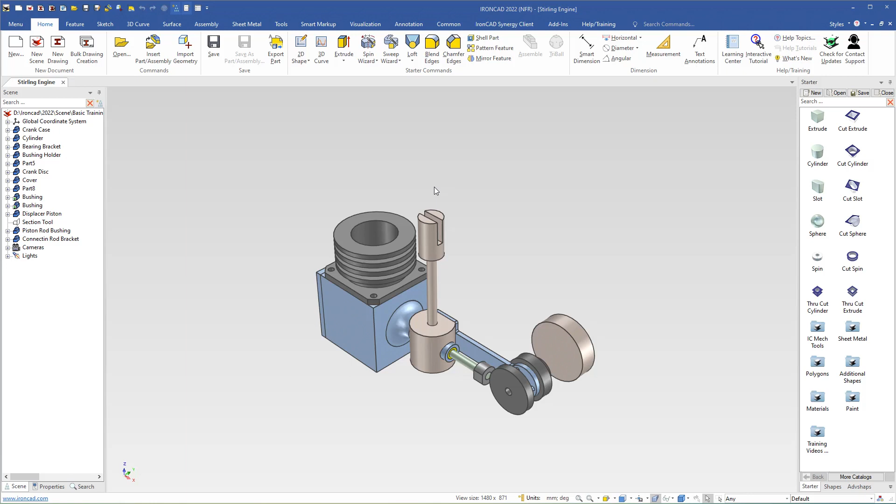Now we will prepare to fasten the crankcase to the pillar, and we will also prepare for the mounting of the connecting rods that we will create later. And we need to add some threaded holes here on the pillar, on the bracket and on the crank disc, and up here on the pillar.

And we will use an add-on to add the holes. And you find the add-on here. If you click more catalogs, we see these catalogs, ICM catalogs, and ICM stands for IronCAD Mechanical, and we will use the ICM Mech catalog.

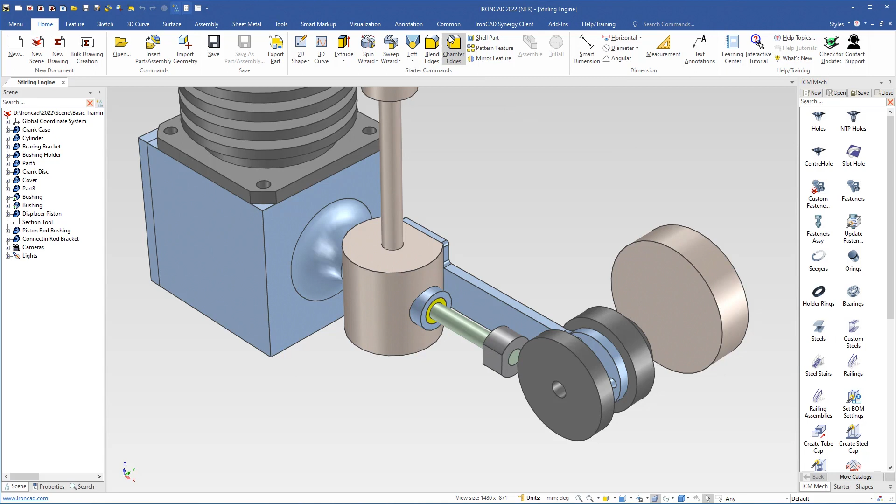If you don't see these catalogs, the ICM catalogs, and you have installed the add-on, you have to come up here to the Common tab and here the Catalog Sets button. If you click here, you will see this menu, and here you have Iron Pro. If you select Iron Pro and open and done, you will see the catalogs here. But if you haven't installed the ICM catalogs, you can use the Tools catalogs to follow along this part of the course.

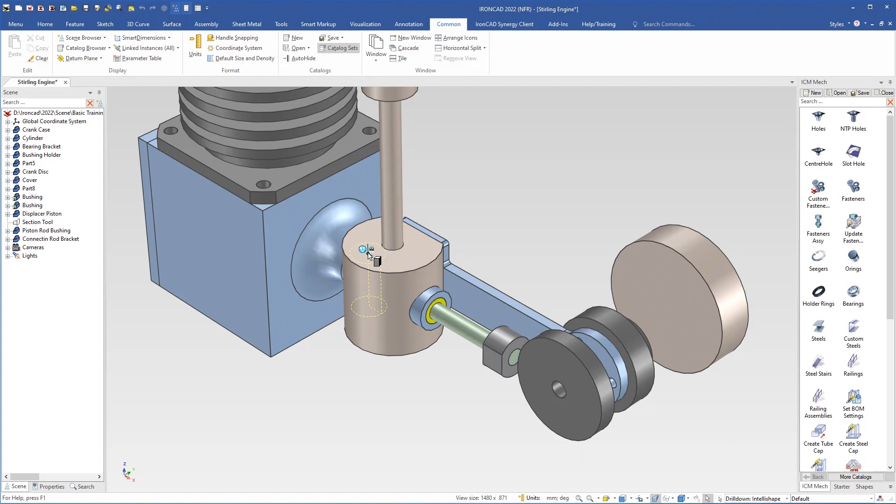This ICM Mech catalog contains several useful features such as holes, fasteners, O-rings, bearings and steels and so on, and all parts are made in metric and inches. But in this case we will use this tool, Holes tool, and I will drag this tool, drop it here on this flat surface. And when you drop a hole in the scene, you will get this menu.

And I dropped the hole here on the flat surface because it will be easier to position it right, because it will be positioned and placed here on this curved surface. So to have the flat surface as a starting point, it's a good idea because it will be easier to move it later.

So when you drop a hole in the scene, you will also get this menu, and here in this menu you can choose from different kinds of holes, like a simple hole without threads, and holes that are counterbored or countersinked, and you can also select threaded holes that are counterbored or countersinked, or a simple threaded hole. If you come down here, you can select the diameter of the hole. In this case we will choose M4 from this list, and the length will be 10 millimeters.

If you come to this side, you will see that you can also choose to let the hole go through the part. So if I check this box, and we see here in the scene nothing happens, you can come up here to click this button to update or to apply. Now the hole will go through this part of the pillar.

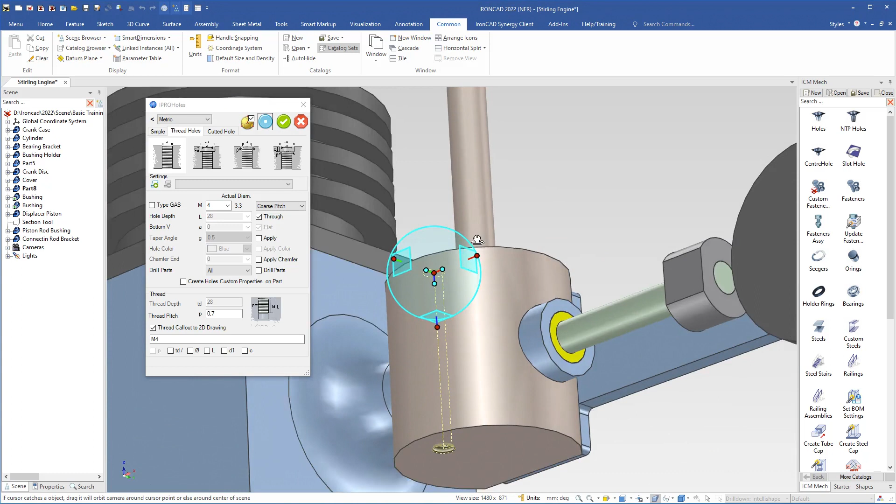If I uncheck that box, the flat box will now be checked, and if we look here on these images, that is a preview of how the hole will look, we see that the hole will have a flat bottom. But if I uncheck that box, now it will be a drilled hole, and we will have it that way.

Then we come down here, we have this box, thread call out to 2D drawing. This box should be checked so that this information, M4, will be added to the drawing when we make a drawing of the pillar later in this course. And if we come up here, we have these buttons. If we hover over this button, it says apply and exit, but this button is the cancel button, and this is apply and exit, and this is the apply button or update button.

And this button is for the TriBall. Now the TriBall is active in the scene, but if I click this button, I will turn off the TriBall, and if I click again, I will turn on the TriBall. And this small box that is checked means that if I click apply and exit, the TriBall will be active when the menu closes. But if I uncheck that box and click apply and exit, the TriBall will be turned off when I close the menu. But I will have it checked like this. And here you can change between metric and English, that means inches.

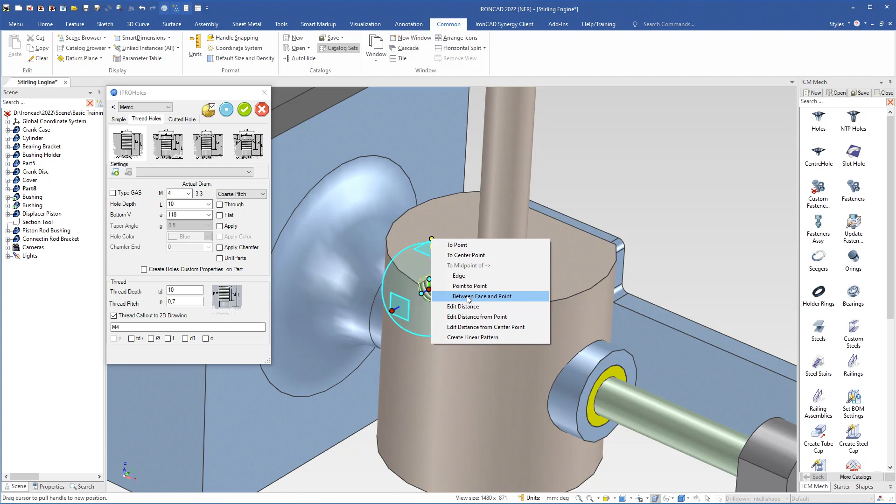Then I deselect that axis and grab the center handle and drag it to the edge here, and then I will drag it to this node to snap it to the node, and then I will right click this axis, right click to choose between face and point, select that face and this edge, so now it is placed in the middle between that face and that edge.

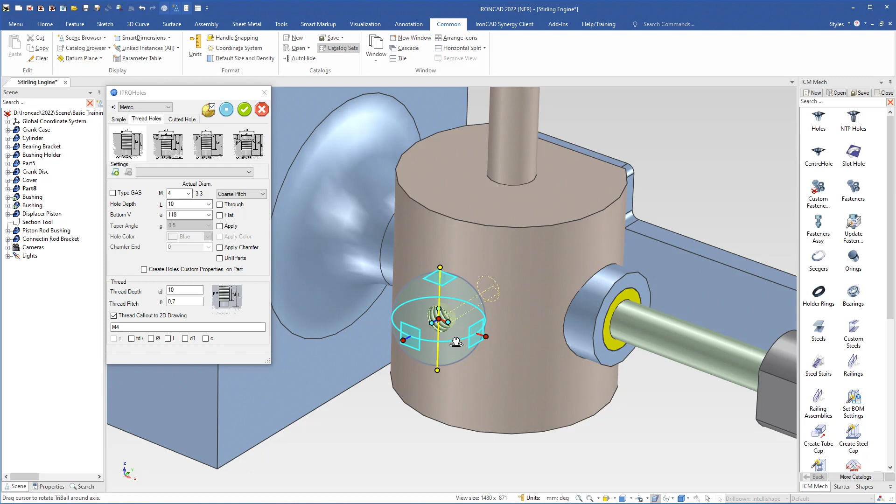And sometimes when you move a hole, the threads can look a little bit strange. That is because I have moved the hole. To make the threads look correct, you just come up here to click the apply button, and then the threads will look correct in the scene. But in this case they look fine, so I will click OK here.

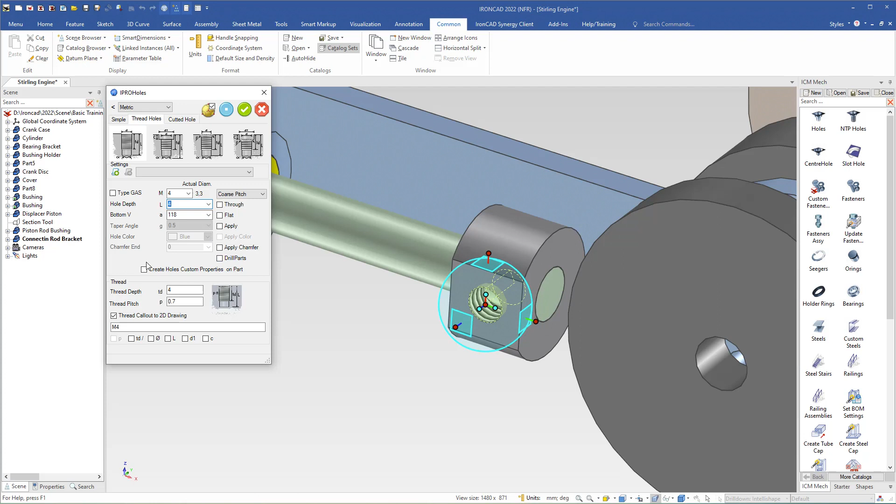And then I will turn off the triball. Now we will add a hole here in the bracket, so I will grab this tool again, drop it in the center, and we come over here. We see M4, but the depth will be 4 instead of 10, like so, and this box is checked, and then I will click OK, turn off the triball.

We come over here to add a hole here on the crank disc. I grab a hole, drop it here, and this hole should go through this part, so I will come over here to the menu and check this box through, and you can also update if you want to. Click apply.

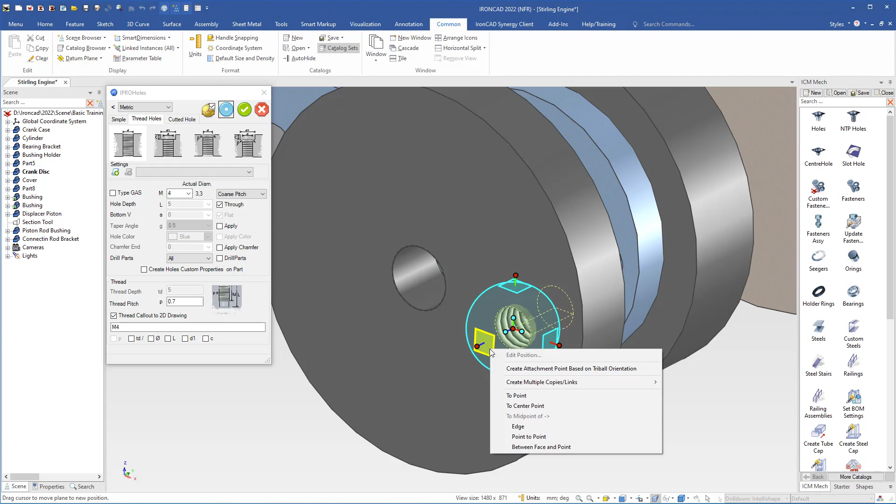And then we will make sure that it is in the right position, so I will select this 2D handle. So we have to move this hole to a starting point to place it in the right location, so I will right click this 2D handle, then I choose to center point of this hole, then I grab this handle and drag it back, and I'll drop it here and type 11 and hit enter. Then I turn off the triball and I will close this menu.

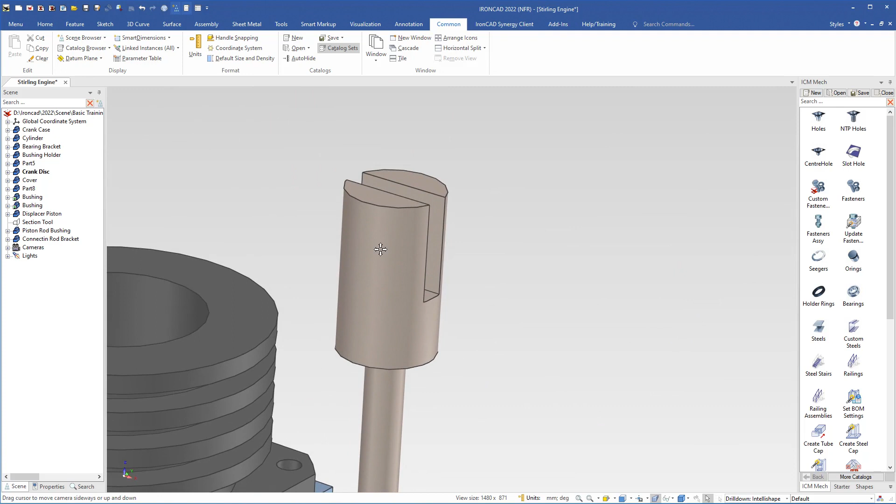Then we will add a hole up here. Let's see now, like so, and then I will grab a hole and drag it, and I will drop it here on this flat surface. And now it is set to go through the part, and now it will go through the whole part. But that will change when I rotate the hole.

So I will select this axis, left click and hold inside and move it to this position, drop it there and type 90 and hit enter, and now we see that the depth has changed because now it goes through the diameter of the pillar.

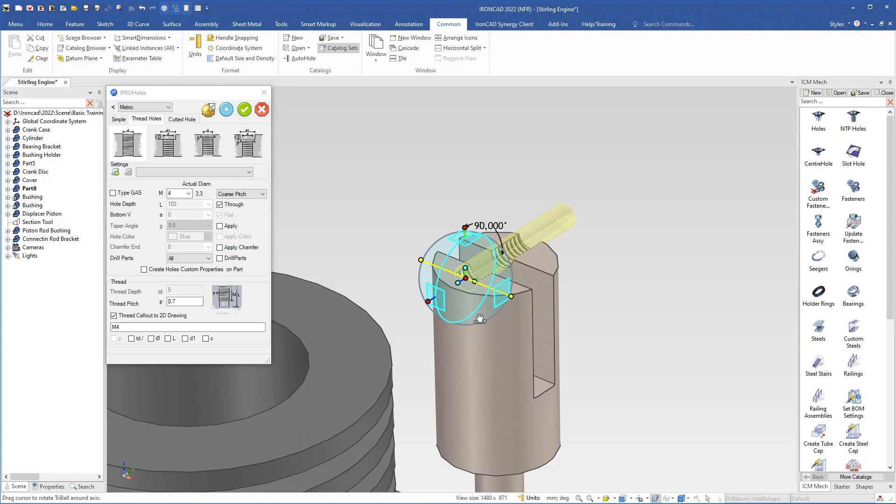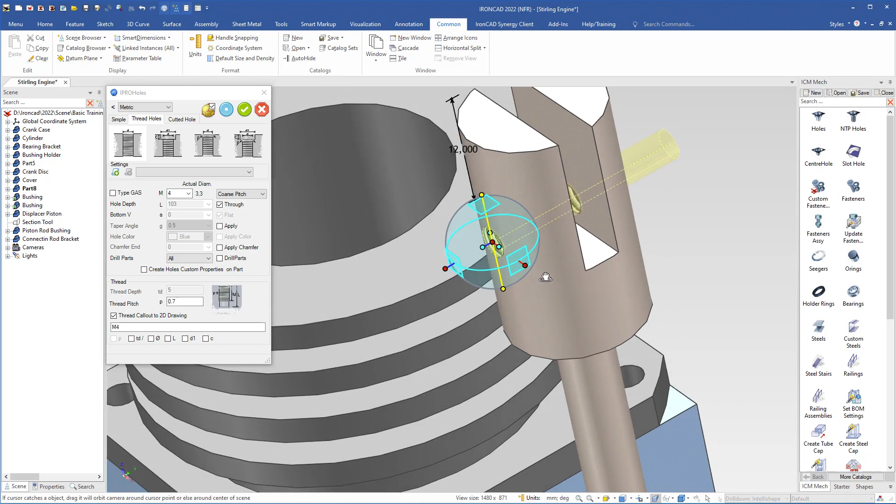Then I will deselect the axis and I will grab the center handle, drag it to the edge and drop it here, or snap it to this node here. Then I will grab this handle and push, and I will drop it there and type 12 and hit enter. And we will see if the threads look alright. Yes. So I will close this menu and I will turn off the triball.

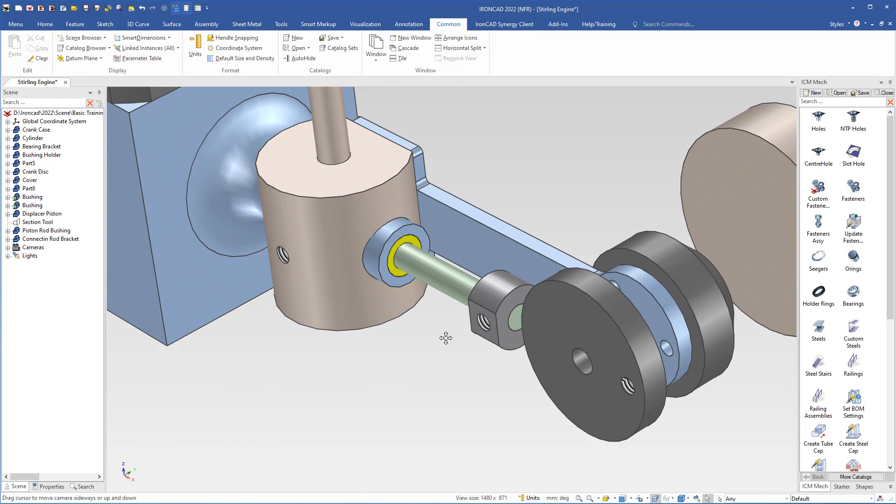But I see that I have to change the depth of this notch, so I will select it in IntelliShape level and I will change it to 20 instead and hit enter. If you want to make some changes to a hole you have added, you can select the hole and then you right click and then you choose add-on properties and the menu will open. Then you can make the changes.

So now I will go to top front right and fit scene. Then I will save this scene and I will continue in the next video.